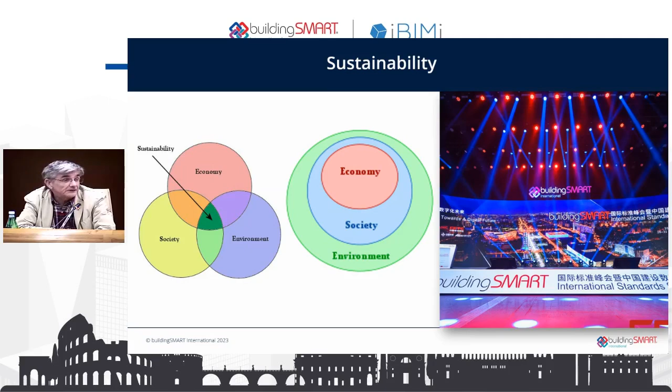We also need to put it in the context of the United Nations Sustainable Development Goals, which is really a summary of the agenda. I've highlighted a few squares, but I think all 17 probably come back to the built environment and the natural environment and how we use it. So I think I'm wearing a sustainability badge based on these agendas, and we can organize our thinking around these goals when we get to the detail.

So essentially, we've got different views of sustainability. We sometimes talk about the triple bottom line of considering the economic, environmental, and social dimensions as three parallel considerations, or as we saw in the diagram, sometimes it's a pyramid where the environmental considerations are the foundation of what we can do.

We also have another acronym, the ESG assessment: environmental, societal, and governance. This is the more recent formulation of what we mean by sustainability. This is made difficult because for some people these issues are fundamental, while other people look at them as risks that can be managed. In the finance world, in the corporate world, ESG is just an entry in the risk register that they might get something wrong along the line. For other people, it's more fundamental.

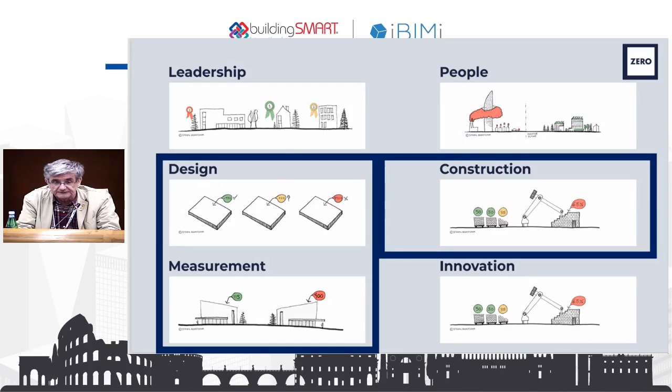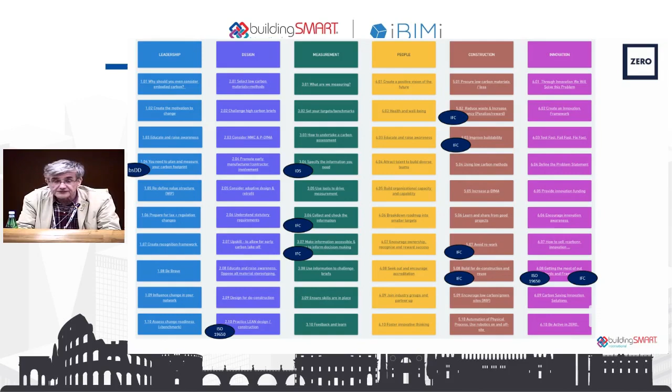They have developed 60 action points, which is quite a lot, but I think the buildingSMART community has something to contribute to some of those in a very substantial way. And of course, we need to make sure that as well as contributing to the measurement, we present, understand, and communicate what we're offering. This is just an example of one presentation of some ideas.

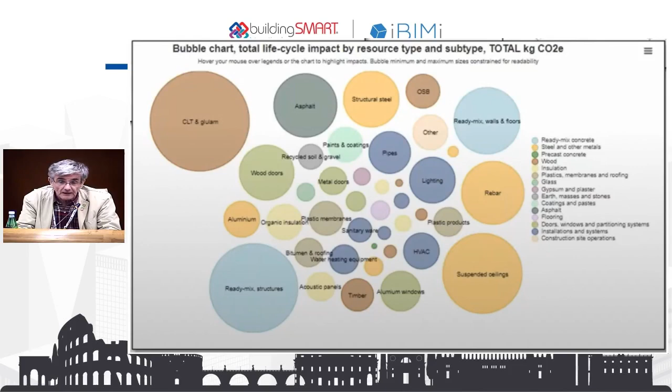So perhaps the key thing that buildingSMART can contribute is the twin threads of sustainability and measurement. So I think that might be the big picture. It's sketchy, and now I'd like to hand over to Frank on my side here, who can talk more specifically about what sustainability means. Thank you.

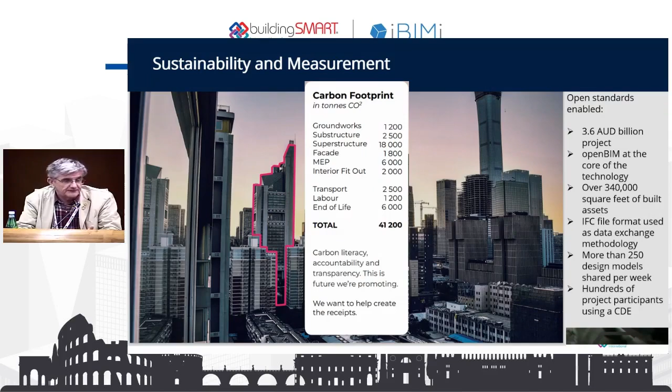Thank you very much, Nick. Good morning, ladies and gentlemen. I'm very pleased to speak about this topic: what we should do with the data and what can be the impact on the calculation of life cycle assessment, and what it can change in the way the financial world is also acting, because I will also tackle the point of translation between technical performance and financial performance.

Well, first of all, we spoke about ESG: environmental, social, and governance. Something I got from my friends from Drees & Sommer, because I'm also working with the Climate Positive Europe Alliance on taxonomy checks and data management. You see that when we're talking about ESG, the first thing is that we need data. Why do we need data? Because we have to look at the quality of the performance of buildings, and also we need to look at the reliability of data, which is often forgotten. What is reliable? How can I trust the data you gave to me? This is really important, and the fact that we can now work with systems, work on patterns for data systems, and work at different scales is really important.

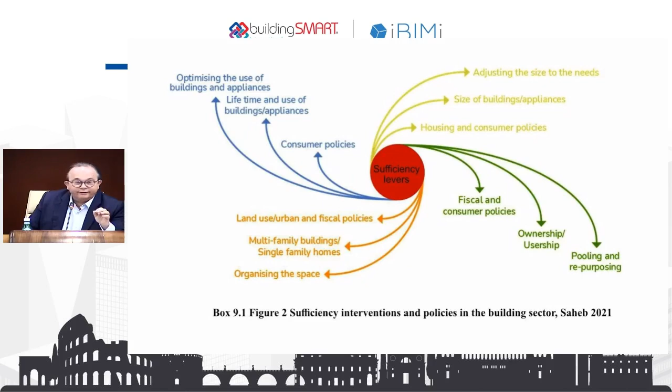If you want to read the IPCC report, which is 3,000 pages, please start by reading the report based on working group 3, and look at the sufficiency approach and definitions. This is really key if you want to act and have an impact on how we build infrastructures, buildings, roads, whatever. That's where we have to look. And the definition of sufficiency has nothing to compare with another one. It's really this word, sufficiency.

So, as I said, the main point is: where is the data? We don't know, because we're used to speaking about greenhouse gas, but we have several boundaries and definitions with the same unit, CO2 per square meter, which is really confusing. Because if you talk about energy in use, embodied carbon in materials, or life cycle assessment on a 50-year standard basis, we are all talking about kilograms of CO2 per square meter, but with totally different definitions and calculation perimeters. Everybody talks about these numbers without knowing what boundaries lie behind them.

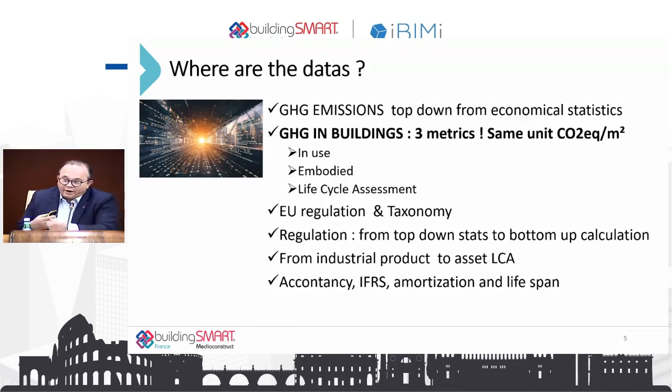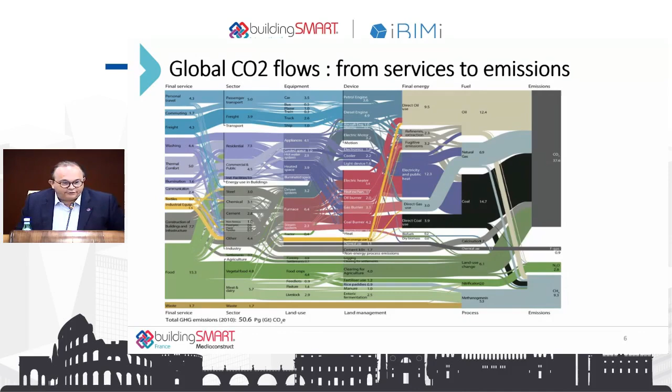So, first of all, the global flow of emissions, from services to emissions of carbon at the end. This is the way it's calculated around the world. Each nation has to do its national declaration and national contractualization. For example, I took a research paper made in Ireland. It's very interesting because it's a dynamic vision of the global impact of construction plus the energy used in the building. You see the flow of carbon, and maybe at some point we have to think about destroying part of our buildings to build new, much more efficient ones.

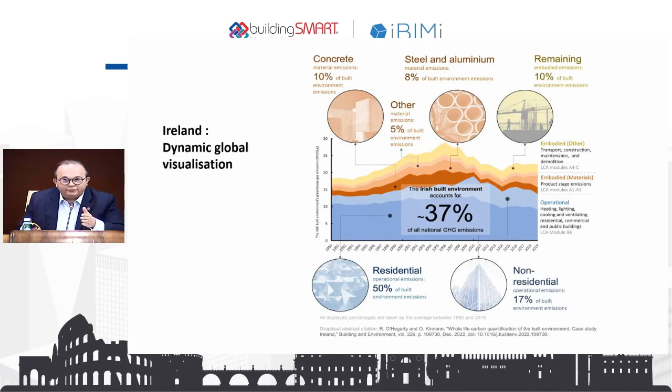Because it makes sense if we want to achieve what the Swiss have done. It's very interesting, they do it the opposite way around. They look at the global budget they have until 2050. This is also from the IPCC report.

If you look into it, you can imagine that if we want to stay under the 1.5 degree scenario, we have a remaining budget of carbon that we can emit. So we use this equally per capita, and we say, well, how can I allocate my carbon emissions over the next 30 years across industry, buildings, transport, and others?

It's very important, because then you can balance whether you prefer to put your carbon emissions into operations, or into building new buildings or retrofitting existing ones. A very interesting approach, always dynamic. Think dynamic.

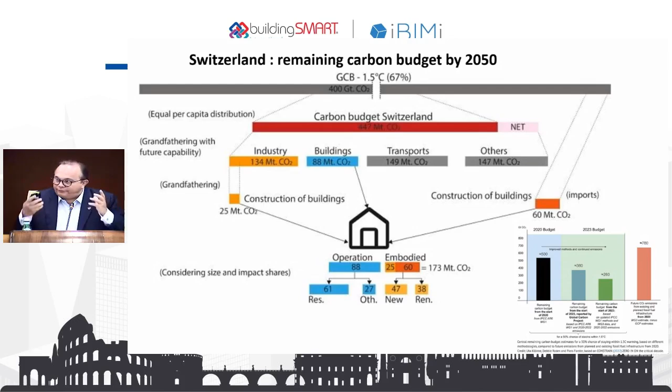Stop thinking about plans, static vision. Think dynamic, think from a flow. The system is a metabolism, it's a flow of data, flow of energy, flow of carbon. We have to open the vision 360 degrees to think in flows and not just in snapshots.

I'll go through the regulation coming in Europe with the Corporate Sustainability Reporting Directive, which will be very impactful for banks and insurance companies, and the taxonomy, the technical approach for assessing what is green or not. The market and regulation is very interesting. In France, since the beginning of the year, it's mandatory to do a life cycle assessment and have a maximum emission in carbon for energy in use and embodied carbon. I think we are the first country in the world to implement such a complex regulation.

This is also linked to regulation on products, with the product declaration, product digital logbook, building logbook, ending with how the interest rate when you buy your house will be differentiated depending on whether it's green or not. Maybe if it's not green, banks will not lend you money, so you stay outside. This is really important because for the first time, from next year, it will impact the interest rate and the way banks give loans. It never existed before - it's the first time we really integrate this extra financial information into the system.

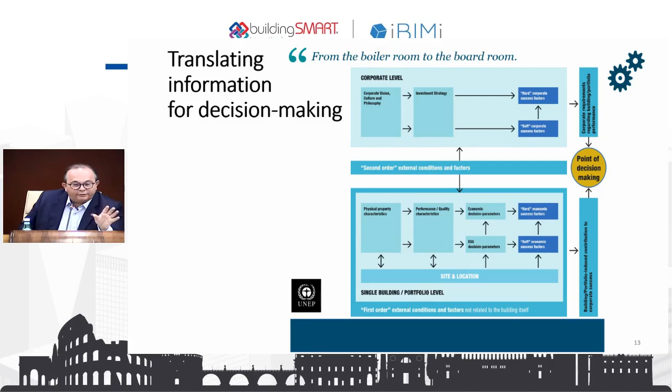So there's a need for translation. This is something I worked on with the United Nations Environmental Programme several years ago - you can still find it, a toolbox to use and translate the information.

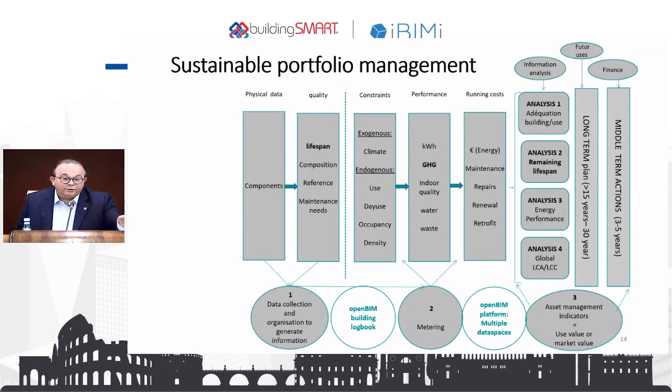This is something I tried to put on the slide schematically, how you go from components, products, lifespan of products, lifespan of system, performance of system, and financial performance of a building, which is linked to the life cycle analysis. For example, something I made some years ago with German colleagues in a building in Germany: if we speak about carbon in the life cycle, you can immediately translate your carbon emission into euros, so you can tell your landlord what the cost will be to maintain the building, and show the difference.

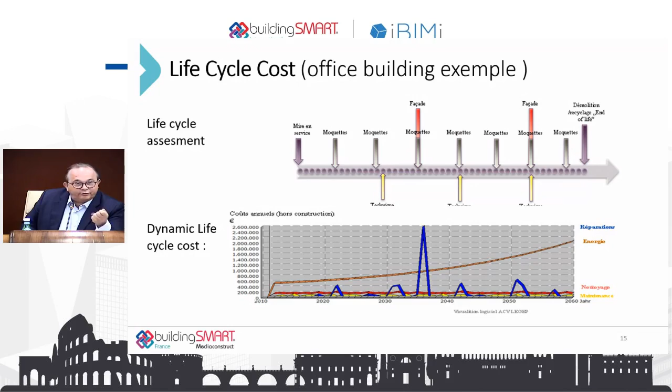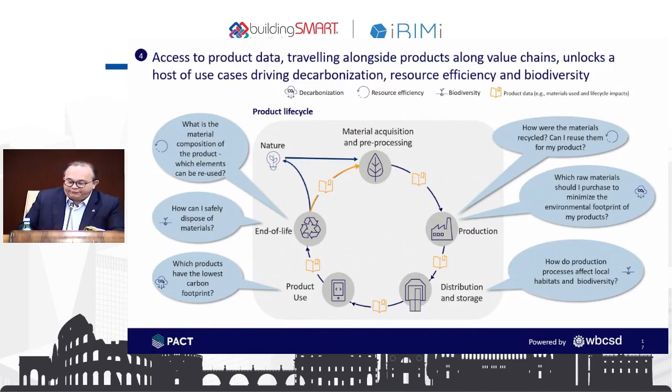Going back to products - this is something that will be taken up later. There's a lot of definitions about products and where information should go. What I want to show is something started by the World Business Council for Sustainable Development, who brought together all the big industry players and launched a PACT program - how to assess product information and how to share it with construction designers, construction companies, and asset managers.

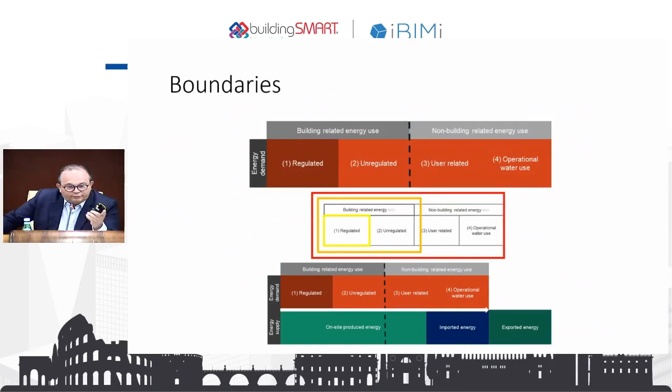This is a way to think about a digital passport for products through to the construction side and then asset management. I'll go through an example on a building logbook where, again, it's dynamic - it's on 50 years. Why 50 years? Because that's the standard life cycle in the norm for life cycle assessment. But of course it would be very interesting to say what the real lifespan of a building will be in the coming years. The idea is to have information I can input into a dynamic drawing of how the building or construction will behave.

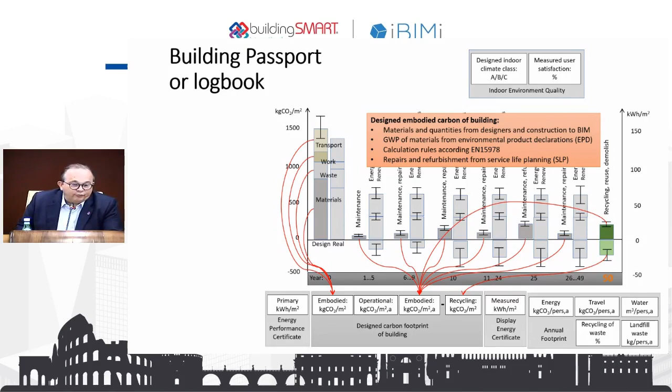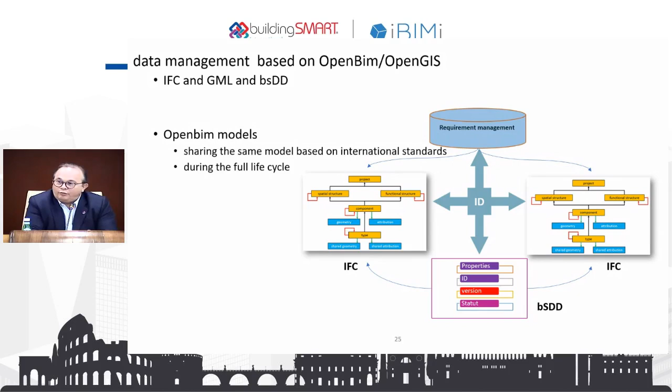What's important for buildingSMART is to implement the standards in the high-level construction forum, in discussion with the European Commission and several DGs - DG Grow, DG Environment, DG Finance. You know we can use this model - I won't explain it, you know it better than I do - or we can clearly put the IFC development and all the work done by buildingSMART externally into the data management of a system.

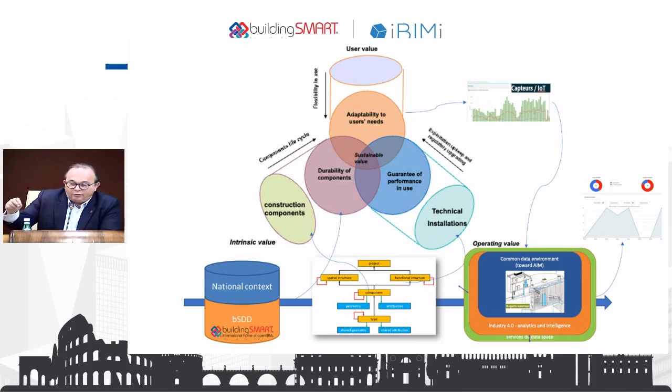This is where we can link the information and the sustainability analysis, because sustainable value needs a vision about the components' life cycle, the user value, and also the lifespan of a building and the lifespan of a technical installation.

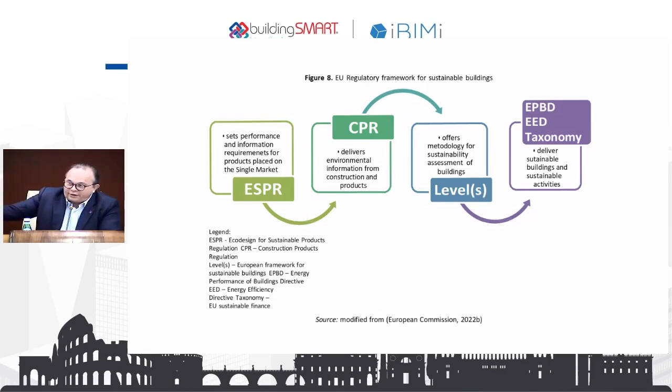So if I want to conclude, we are again on this flow of data that are coming from the components, from the product regulation, from the building regulation to the financial regulation. And this is where the building characteristics can have an impact on the financial valuation. And we need to translate the lifespan, the life cycle into a valuation system thanks to the taxonomy.

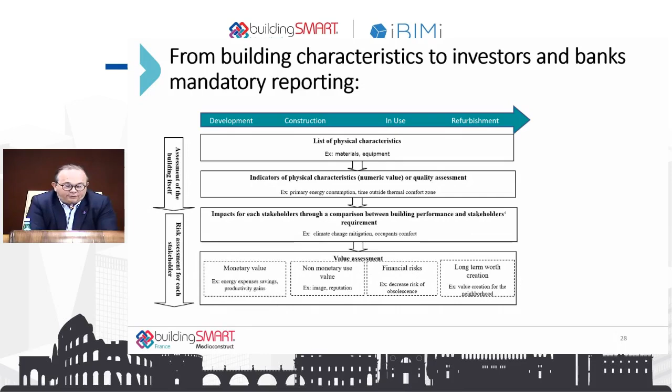So just to conclude, I think that BSI is really the core body. That's why I will ask the European chapters to be together in order to work together inside buildingSMART International, to work with the European Commission, and to bring to the users the capacity of data flow management, and the capacity for the experts to translate the technical performance, the greenhouse gas emissions, the life cycle assessment into something which can be implemented into evaluation.

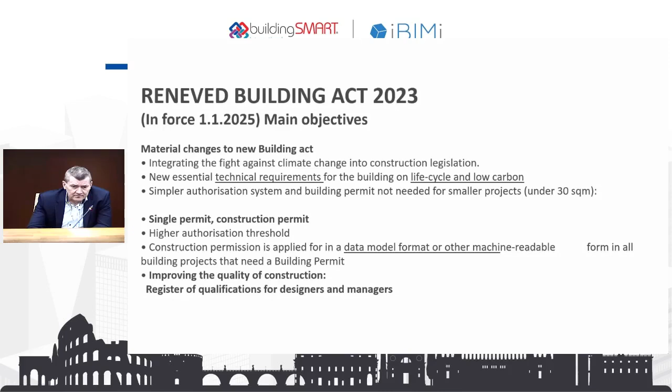This is kind of the new legislation. We now have 1.5 years to prepare the use cases and design new tools for building control to read the designs and read the necessary information, and also make this kind of code checking tools for the IFC.

And we have started it. We have 2 projects, this kind of RAVA3 Pro project, and also on European level we are participating in the Accord project, and it is concentrating on this kind of low carbon emissions.

If you think about the background of our Building Act, our government announced that Finland will be a carbon-free country in 2035. On EU level, the year is 2050. So we have very ambitious goals, and the building sector is a very big CO2 emission producer.

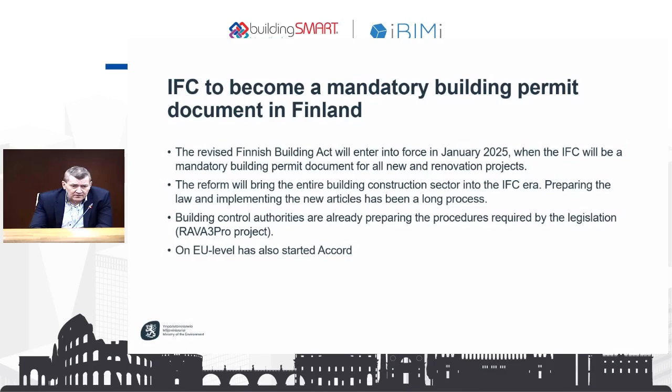Here are the main points in our BIM strategy: from the year 2025, building permits are applied for using BIM or other machine-readable formats, so it is compulsory to deliver building permit documents as BIM designs, and they must be delivered in open BIM format. The only format that has been approved by our National Archive Bureau is IFC4, and now they are looking at whether IFC 4.3 could also be approved as a permanent archiving format.

We will collect, after 2025, to the National Archive all the BIM designs of all new buildings, and also major renovations that need a building permit, so that those, if they have been planned in BIM, they also have to deliver the BIM designs as part of the building permit documents.

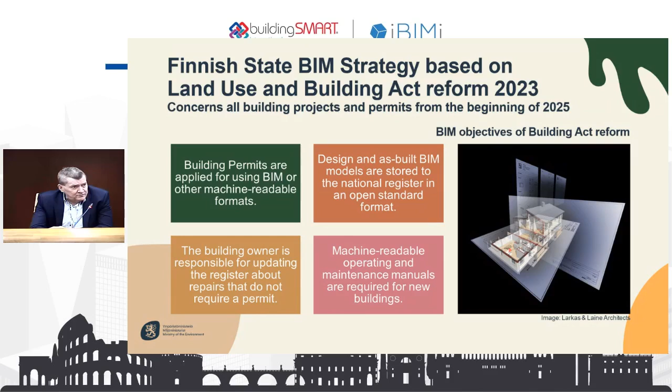Then we also make this kind of digital building logbook. You have to have a machine-readable operating and maintenance manual before you can get the final inspection and take the building into use.

Here is the reason why we have been advancing this so fast: our building industry, maybe 80% of buildings, has some part designed in BIM, so our industry, also the architects, approve that these BIM designs can be handed to the public administration and archived in our national register.

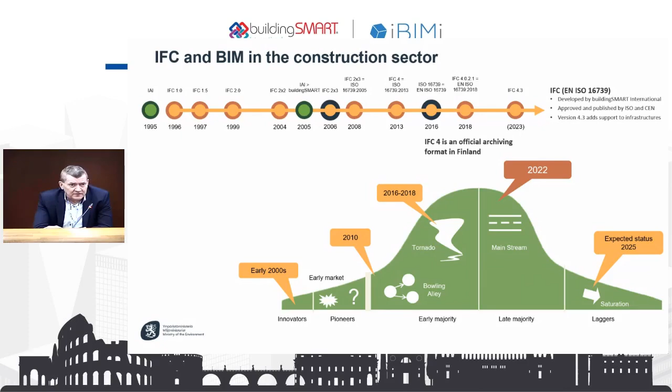Here is the path that we have been following. The first steps were taken maybe 20 years ago, but if we think about where we are now, it started in 2015 when we got this new building control electronic processing system called Cloud Permit, and Trimble had then developed, over maybe 5 years, this kind of e-permitting system that is cloud-based.

Then we took small steps at a time, and now we have the new legislation, just a month ago, that makes IFC compulsory and widely used in every kind of building project in the future. And there are also next steps, so we will get this national register ready and built, so that we can start to collect designs there in 2027, according to the law.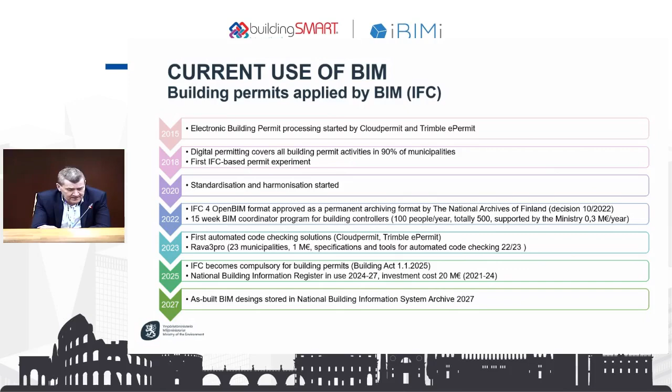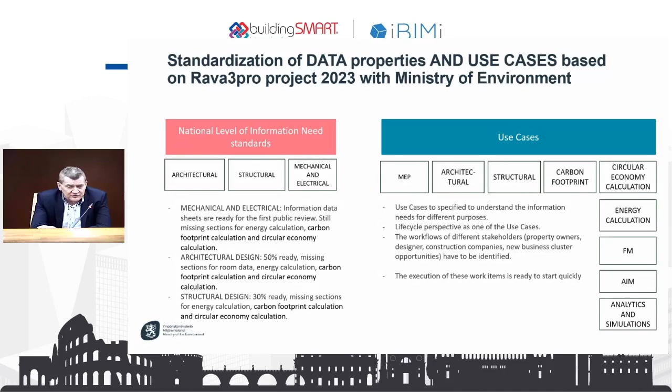Here are the use cases and a description of what we are now doing and what stage our process is at. The most important use cases are also the carbon footprint and circular economy rules that we have to define so that we can automatically read the necessary information from the designs.

Here is our roadmap, what we have to do. This is a to-do list, the next steps and how we have to go forward step by step.

Everything must be based on open BIM and also international standards. We are trying to get an integrated system so that when we renew our building code, we try to make the rules machine readable. We already have this in our taxation legislation, where no new taxation laws come unless they are tested to be completely machine readable. We try to get the same for the building code.

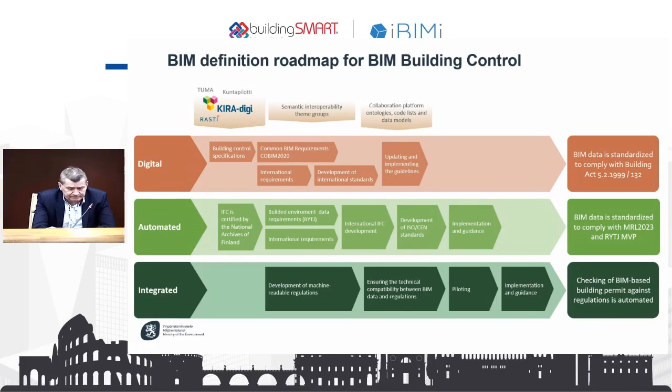Here is the new regulation about the climate declaration and material declaration. There are two documents that you have to hand over when you apply for building permits, and then after the building has been built, you have to make a document showing how it went during the building stage.

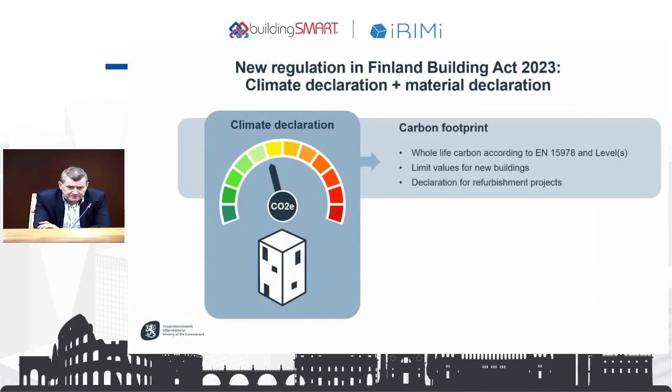Here is the climate declaration and material declaration. First is the carbon footprint. It means that when you apply for a building permit and it is finalized, you have to show all the materials and their carbon footprint in kilos.

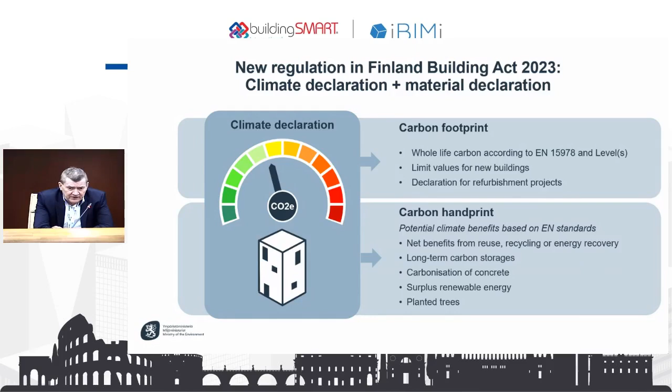Then there is the carbon handprint. There is the calculation of long-term carbon storages, carbonization of concrete, and the life cycle impacts.

Then there is the material declaration that you have to have of all the building materials you have been using, their carbon footprint, the building components, materials, and origin of materials.

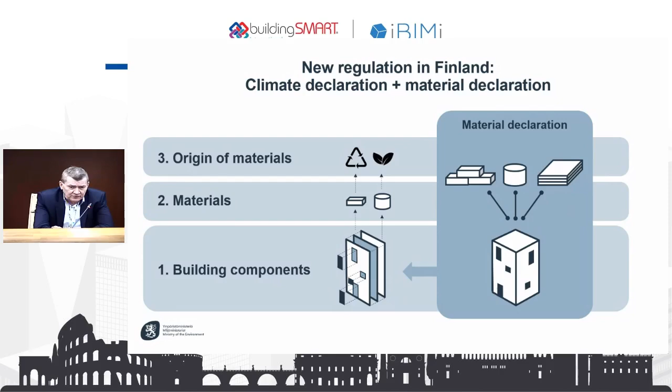With this, we have to use BIM because the calculations are so complex that it is impossible to control them without tools and using BIM.

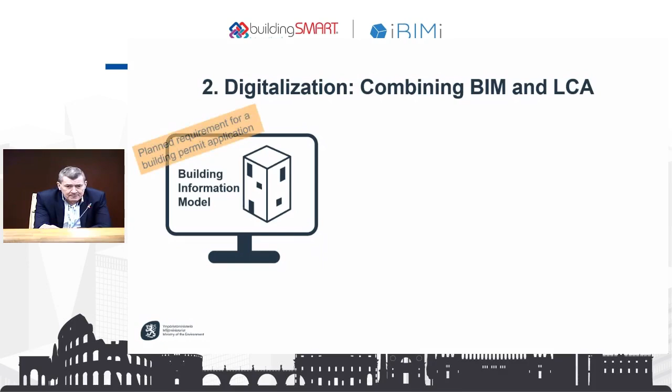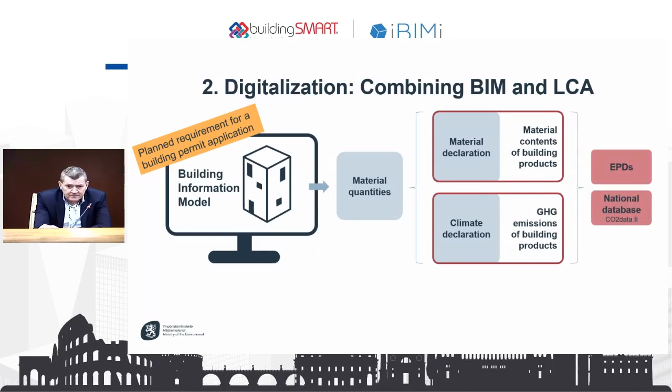Here are the details that we are defining in the bylaw that will take place before the end of this year.

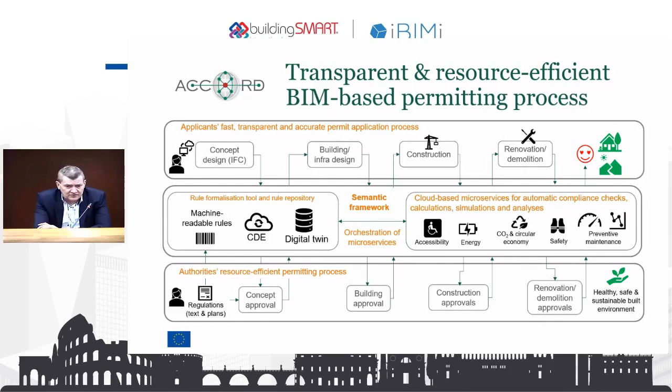We are also creating these new rules in this Accord project. There are about 8 countries in Europe that have their own parts. Our part is this carbon-free building. Here is my presentation.

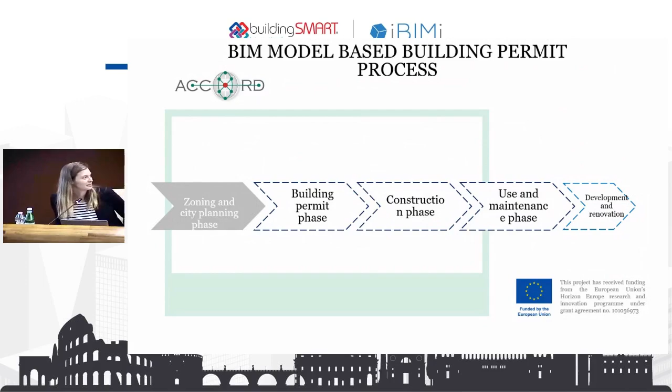Thank you, and thanks to all 3 of you for addressing the needs and the latest developments on this topic on an international, European, and national level. I would like to ask you now to change seats with our next 3 speakers.

Yeah, but if I may, I'm very proud because in France we did the life cycle calculation system without BIM, and we are the world champion to do something very complex without tools. Always we are French, the best. No, you do it right. I think we did it.

We bought two. So we've asked 3 subject matter experts to share with us how our current work, standards, and solutions can contribute to the sustainability data flow that was just described here. Our first speaker is Bertrand Lac. He works for Schneider Electric and is the leader of the electrical room. Could you please share with us how the electrical room contributes to sustainability?

Thank you. So, I'm working at Schneider Electric. The objective of today is to bring you into the electrical domain and see how the electrical domain can contribute to the transformation towards efficient buildings.

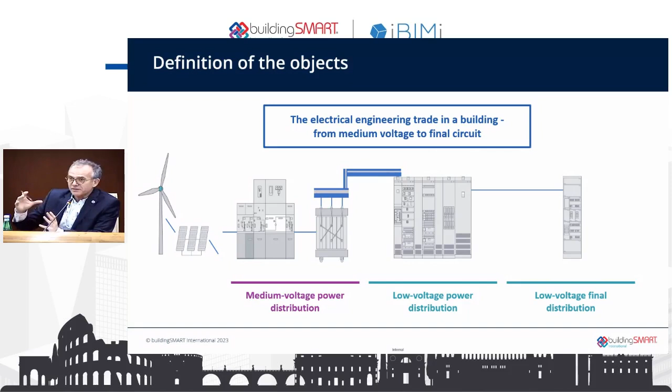And then all the distribution network. The big things that are taking some square meters down in the cellar, the transformer, the switchboards, all these cable trays down to the light and down to the socket. So that's the scope of what we want to address in the design and operation phase.

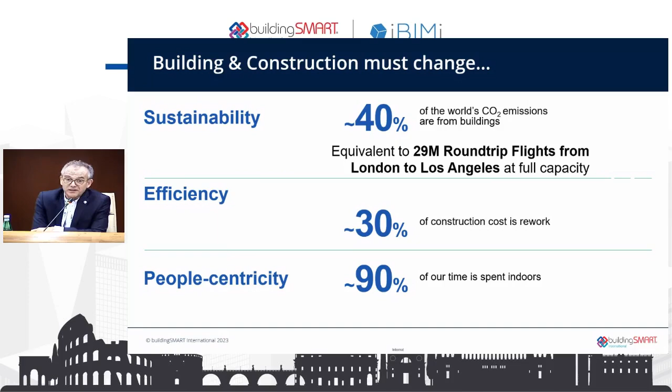Now about efficiency, sustainability, I think I don't need to emphasize these figures because you are all well informed about how buildings are important for sustainability, efficiency, and so on. I just want to add 2 or 3 additional data points.

Buildings are 30% of the energy consumption worldwide, and we can save 30% of that. If I go to electrical power, buildings are consuming 55% of the electrical power worldwide. So it means that buildings are a major contributor to sustainability and energy performance.

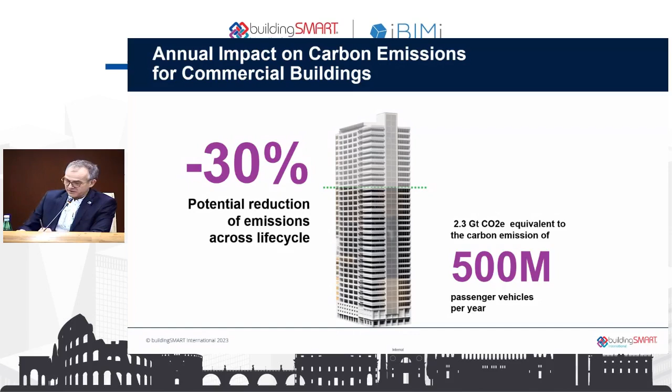And then, last but not least, if we think about operation and electrical consumption, the carbon footprint of a building, 93%, is in operation, not in CapEx. So it's very important to also think, as Frank was saying 10 minutes ago, about something dynamic. It is in the operation that we have to think how we can save things. So what can we do to contribute to that as the electrical room?

So first thing would be, or can be, and will be to select the good products. Also we talk about the product environmental profile. How can you select a transformer that is more efficient than another one? That will start by having the properties somewhere in the dictionary. So updating, upgrading the dictionaries, the BSDD and others, with electrical stuff.

Start by that. Second, exchanging models. We talk a lot about interoperability, having the capacity to have a machine-readable description of the electrical network in the building will save time, will save effort, and of course, a lot of efficiency. Then I mentioned that on the roof, we may have photovoltaic panels.

So this also, we need to be able to simulate, thanks to the location, the GIS location of the building, if there can be some solar input or not. And that creates, and that is a reason why we need to bring the electrical network inside of the building. So here you see that we are on the third column, that the electrical network is not totally independent from the building, and there is a lot of contribution to this.

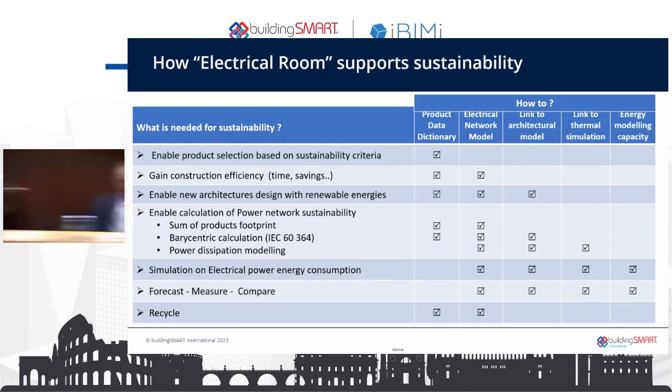Our next speaker is Hansueli Schmid. He represents the product room, and in his daily life is an active promoter of the use of timber material, with obviously one of the lowest carbon footprints. Actually, 50% of timber products consist of captured carbon. Please share with us your thoughts on this topic.

Thank you very much, Céline. Yes, now I would like to draw your attention a bit more to the ecological aspects of sustainability and products.

So the environmental information is actually the basic information to optimize a building. And at least in Europe, we have 7 essential basic requirements for construction. They are described in the construction product regulation, which is also harmonized with non-members of the European Union, like Switzerland. So that affects directly also our legislation.

We have those 7 basic requirements, but they have not all reached the level of essential characteristics. But in the next revision of the construction product regulation, the aspect of sustainability, ecological aspects, will get a new level. They are becoming essential characteristics, and that means manufacturers have to provide this information with their product data sheet.

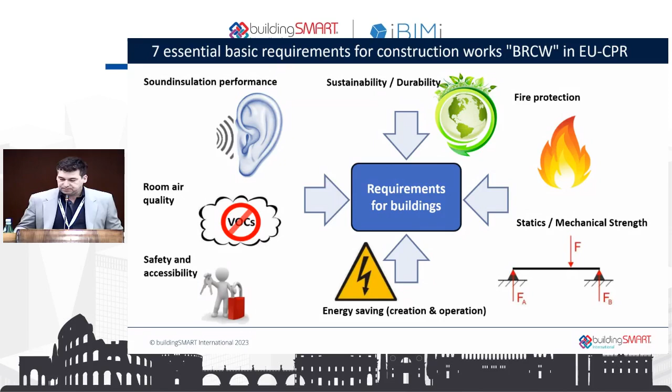Information is needed. With the EU Green Deal, we have many aspects which have to be tackled in the construction environment, and therefore we have to find a way for the industry how to provide information in an efficient way that serves all those needs.

Construction Products Europe has a very good website with an interactive overview. We heard before from taxonomy. This is certainly an important way to support or to set incentives for more ecological buildings over the whole life cycle. That's the important thing here.

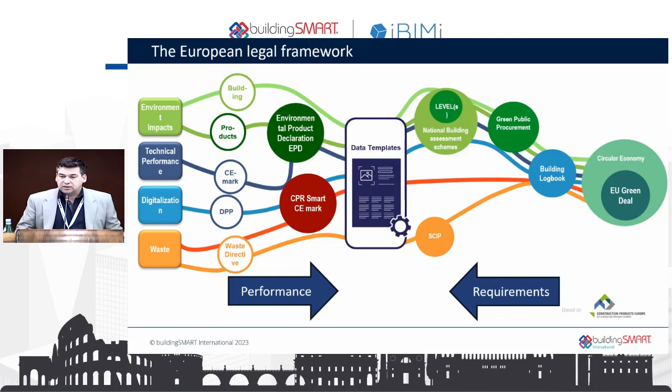So we have many requirements, and we have also different performances, basic requirements, as we saw before. There are different ways to declare that, and we have to bring that together in common product data sheets, or templates first of all, which have to be completed, then digitized into digital product data sheets, which can then be collected in central databases.

So that means that the government is setting the framework, and then the national authorities set the requirements in their building codes. And this is the side of the requirement.

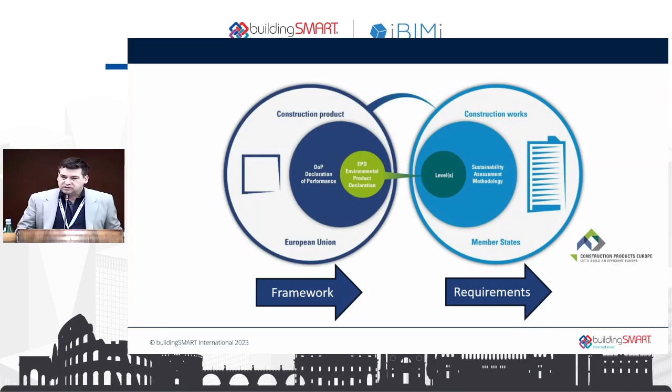And so how can we now provide access to this relevant sustainable information? First of all, standards are our primary source where we extract properties, so we go to the standard. Then we create templates for our industry, and then the different manufacturers fill in the values and then provide those data sheets in a digital way.

That brought us as an industry to the result that we say the standards today are translated into different human readable languages, but one important language is missing. This is the machine readable part, that we have also a code for the computer, and we see now already certain standards which have these machine readable codes.

So you have these different languages, and in the end you have a GUID, which is then defining the interoperability of the information in the digital world. So this is, once again, a visualization. First of all, we have templates based on standards, maybe referred to different classifications. We can have ETIM or others. And then we fill it in, and then it becomes a data sheet.

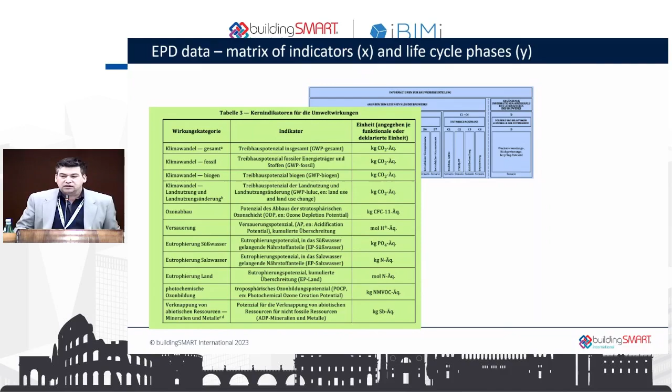We have then on the other side the indicators, different. It's not only CO2, it's many other environmental indicators. And this is then forming the matrix in which this EPD is declared.

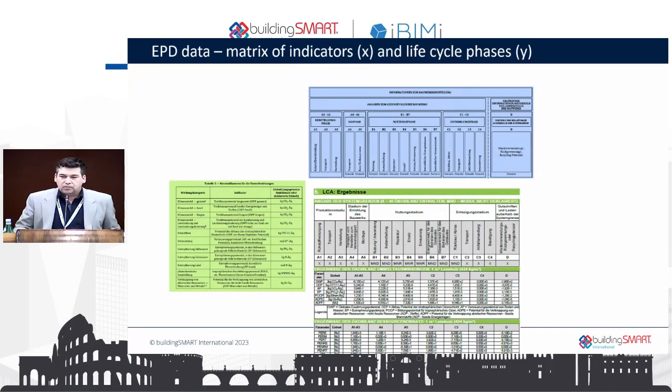So this is certainly something in the product room. We pick this topic up, so certainly something we can provide a solution for. We transformed now all these life cycle stages and indicators into the bSDD. It's a separate domain, you can find it. And we will, I discussed it with Artur, we will make an overview of this data to make it more accessible and understandable what we have here. But this is certainly a very important step.

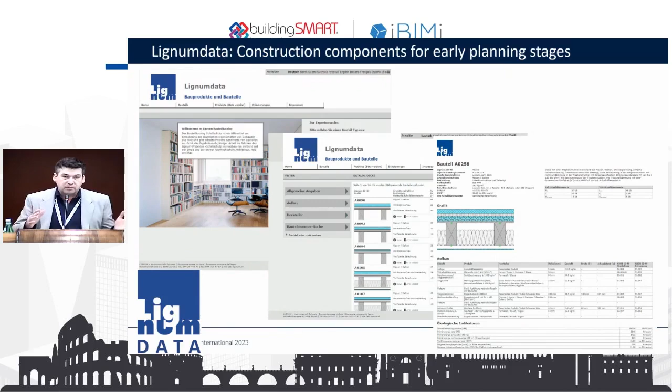So the next topic is the components. We don't work only with products, but also with components in the early planning stage, where we have to optimize the building in respect to embodied energy and carbon emissions.

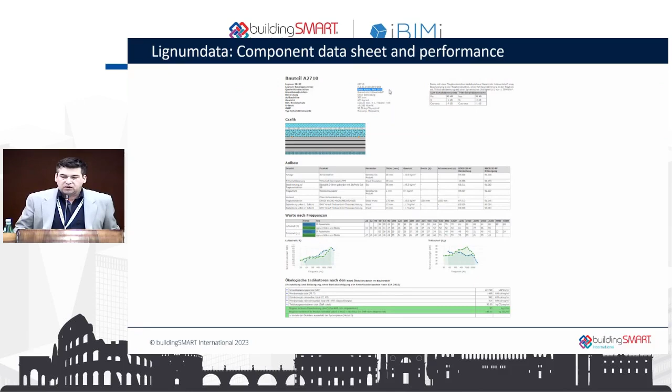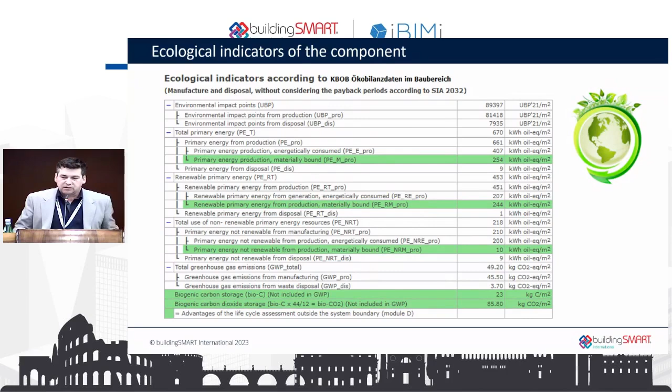There are ways now to calculate and provide this information in a database which has API connection. In Switzerland we call this Lignum Data, but it's certainly scalable to the whole building industry. Here we have an overview of the most important indicators, summing up over the whole component. You see it's not always about weight, there are other advantages too. Some indicators are shown in green, and those are beneficial indicators.

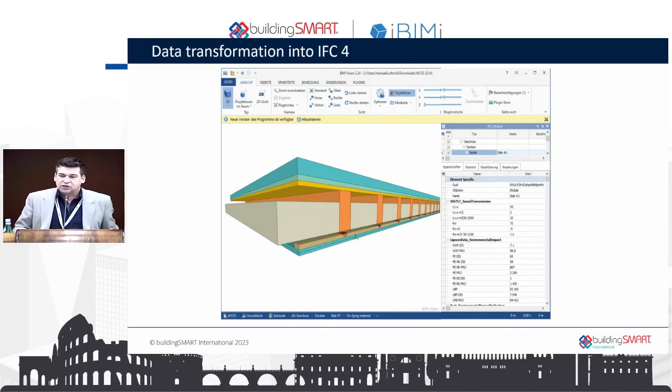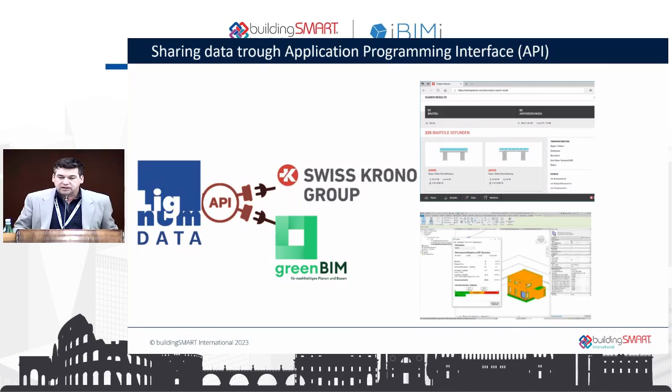This can be transformed into IFC. So far the IFC property set is not up to date. That would certainly be a next step. If someone is in charge of that, we will take contact, and then this data is accessible over our API and brings added value in other applications.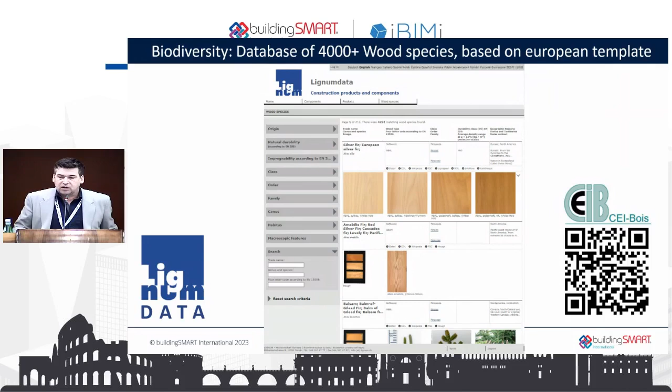So in Europe, together with Finland, Austria and Sweden, we developed a group to tackle this topic. We create digital templates for construction products in wood. Biodiversity is also a topic. We have a template for wood species, and now a database of over 4,000 wood species, which is also relevant for certification of wood.

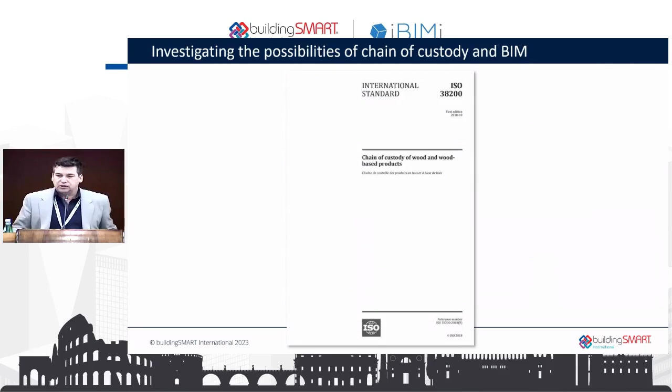And now we discuss how you can transform this chain of custody standard into the digital world. So that was it from my side. Thank you very much for your attention.

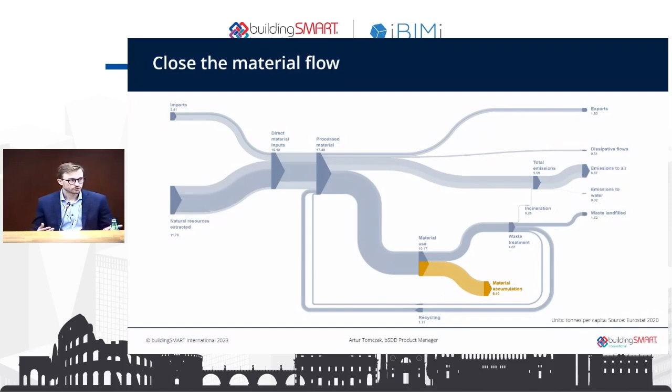Okay, what else will those materials be used for? What can we do to pass them to the next generations? There are many strategies for that. I listed 10 strategies here, and to summarize them, I would say we should be building smart.

So we should, for example, think of the buildings we already have, think if we can improve them, if we could maybe adapt them, reuse maybe the whole building or its parts. And if we need to design something new, we should think about how to make it easy to maintain, adapt, maybe easy to reuse in the future as well. There are a lot of good practices and standards about that.

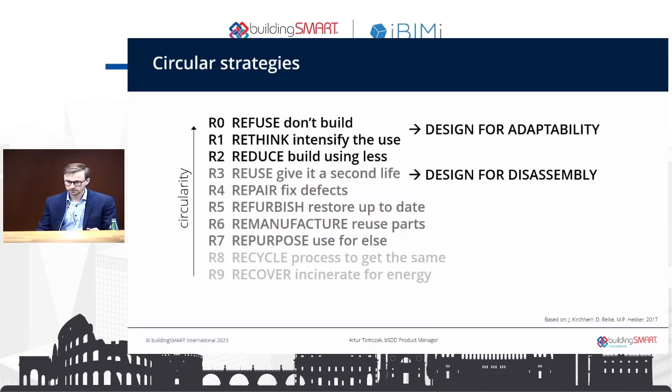I will cover a few of them, and I brought a few examples. This one is the Quay Quarter Tower in Sydney, where there was a building that already existed for almost 50 years. It was too bad to be used longer, but it was also too good to be demolished.

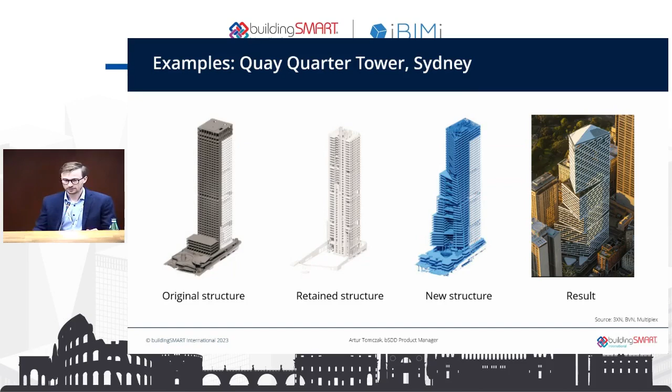So the designer team decided to keep the core structure. 95% of the core structure remained, and they just added new slabs around it, new facade, and this allowed them to save 12,000 tons of CO2 emissions. To give you a comparison, a person shouldn't emit more than 2 tons of CO2 per year if we want to keep up with our objectives.

But this is one example. This is another one: a resource center in Oslo that was opened this month, which is basically a huge facility to store reclaimed materials and reclaimed parts of different buildings. And they are not only stored, they are also digitized. There's an organization that develops material passports, digital models, and you can basically purchase those components.

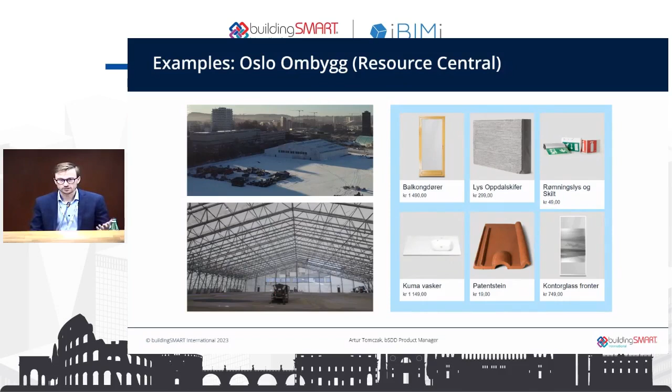But I'm a designer by background, and we are not taught how to design with such elements. This is a huge challenge because, even if we have those products, how do we reuse them? Because they have limitations, and this is something we wanted to address in this project.

So I'm part of this Slettelokka project in Oslo, where we try to build a new small building reusing elements that are more than 100 years old. They come mostly from Norway, some from Japan, but the idea was to keep the design workflow as usual. So the architect designed the building, and then we created this material bank of scanned elements.

We developed an algorithm that matches the elements to the new design, so we can give feedback to the designer saying, okay, if you design it like this, you are able to reuse maybe 80% of the components, but if you make this component a bit shorter, you will be able to save even more emissions.

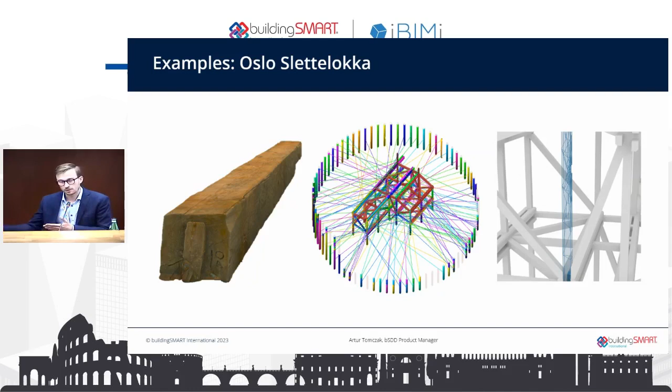So this is one way. I'm also part of 3 projects about measuring circularity of buildings. This one is from Portugal, where we tried to make a way to measure circularity of buildings based on BIM models. In this example, we have a model that was prepared for this demonstration.

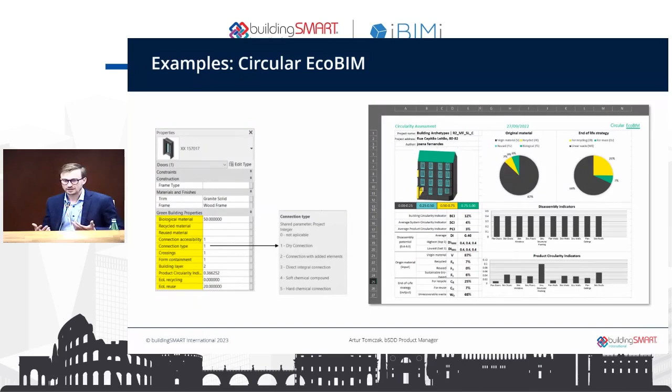It has a lot of properties that you normally don't find in your BIM model, such as connection type, which takes a value from 1 to 5. But how do we define those properties and those values? This is where OpenBIM plays a significant role.

I brought here one example from the ISO standard on disassembly, saying that all load-bearing elements should have reversible connections. And I brought also one example of the connection. If I ask you, probably you won't be able to tell me if this is a reversible connection or not, because yeah, there are screws, so probably you can unscrew them, but it's also anchored in the concrete, so we don't really know.

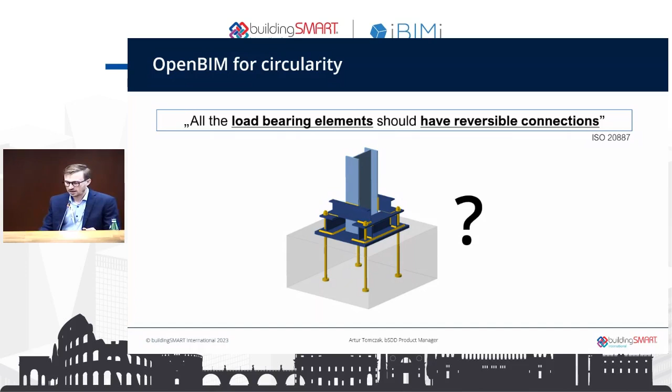So we need to have experts that tell us if it is or not, and we need a way to document whether it's reversible or not, if we want to automate future reuse of components, or maybe easier maintenance as well. And here we can use some open standards.

So for example, in IFC — yeah, there's a mistake, it's not ISO, it's IFC 4.3 — we see that we know what elements are load-bearing because we have a property that says whether it's load-bearing or not. So we can make IDS, information delivery specification requirements, saying that all load-bearing elements should be reversible. But in IFC, we don't have a reversible parameter.

We don't have such a concept. So what we can do is use the data dictionary that was already mentioned, and propose new properties, new concepts, and extend our IFC, enriching it with more information relevant to different use cases. This is a very simple example, but you can think of many other ones, such as mentioned before — indicators like global warming potential could also be required on our projects using IDS and bSDD.

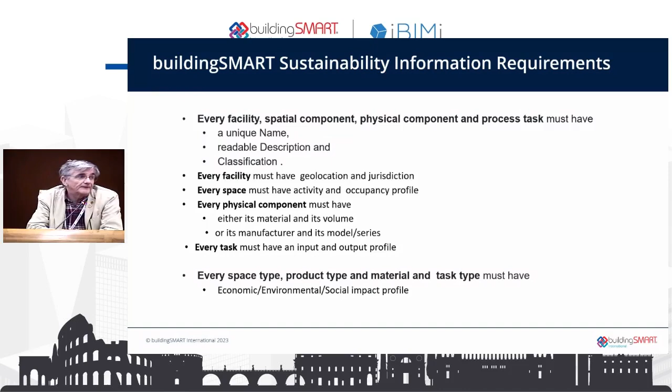At the design stage, when some things are unknown, but we still want to assess sustainability, and when they are completed and in operation, when more is known.

So the question that I'd like to put in front of you is: is there more that buildingSMART can do? Which means, is there more that you can do? It's a question about, can we form a group drawing on, called for now the Strategic Group for Sustainability, drawing from the other rooms, delegates from other rooms and other chapters, and should we give ourselves a year to make an impact.

To have a manifesto by the middle of this year, with some kind of endorsement scheme by the end of the year, a sustainability IDS, a minimum amount of information for models by the autumn, so that we come back in a year's time and say, have we made a difference? So actually give ourselves a question, what could we do in one year, and then set out to try and do it.

And that's very different to the way the rooms operate, where they set their own timescales. I would like to turn it around and say, what could we do in a year that would make a difference? So that's my challenge question.

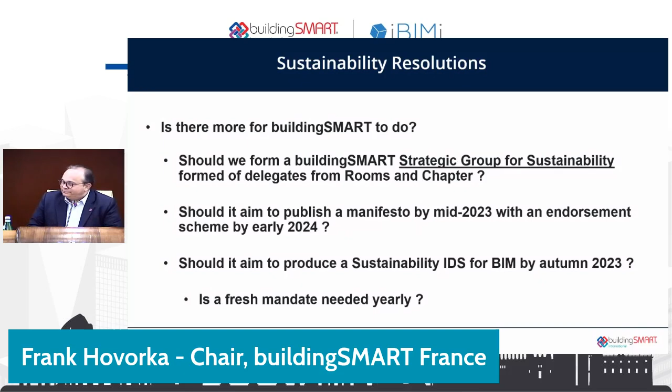So these are your words. This is something I want to add: there is no more work to do. We don't want to ask you to do more. We ask how we can connect the work you are doing, because the key of all the presentations you heard—thank you very much, all three of you—is that you have given an example of how you look at the data flow from a different point of view.

Thanks to the bSDD, we can add metadata on top of what we already have in the IDS, or thanks to the IFC. So there is no more work to do. This is really something I want to emphasize. There is no more work. It's a matter of connection.

So what we propose with this strategic group for sustainability is how we can give information to new stakeholders, because we are used to working inside our technical room. I was asked to work in buildingSMART France even though I don't know anything about technique—I'm from finance. As a financial guy, because of what I showed you about the Corporate Sustainability Directive, green finance, and so on, I need reliable information about how green a building is, what its carbon weight or carbon assessment is.

Who will give me that? PwC, EY? Yes, they can do it. It costs me a lot of money. And it's not reliable—well, it's reliable because what is expensive is considered reliable.